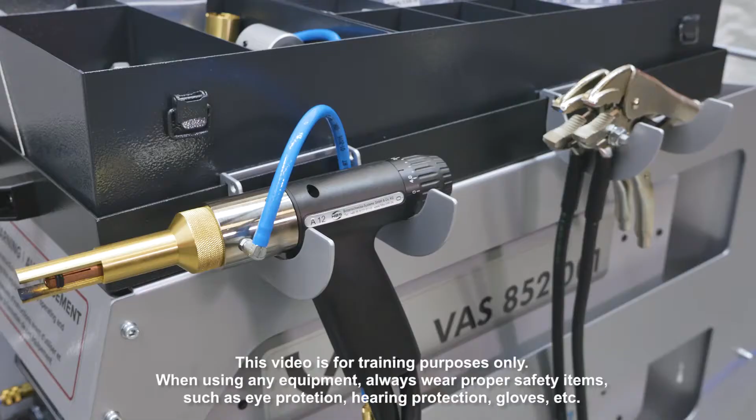Today we're going to be going over the carbon system. This system will do the structural aluminum studs welded onto the vehicle for ground studs. It'll do rivet removal. It'll also weld on the tabs for the dent removal system. On the carbon unit, we are going to start off with doing aluminum bits for doing dent pulling.

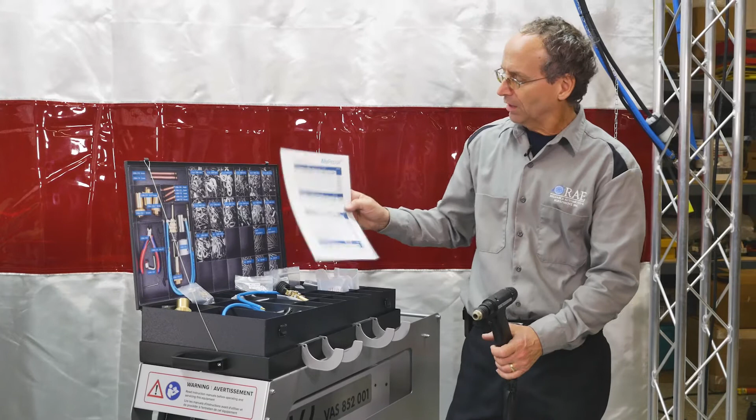So this is the gun unit that comes with it. A couple settings on here that we're going to go over. We have a little card here that will tell us everything that we need to know. So to get set up for the bits, this is the first piece that's going to go on. This will slide on. It's held in place with the little Allen screws.

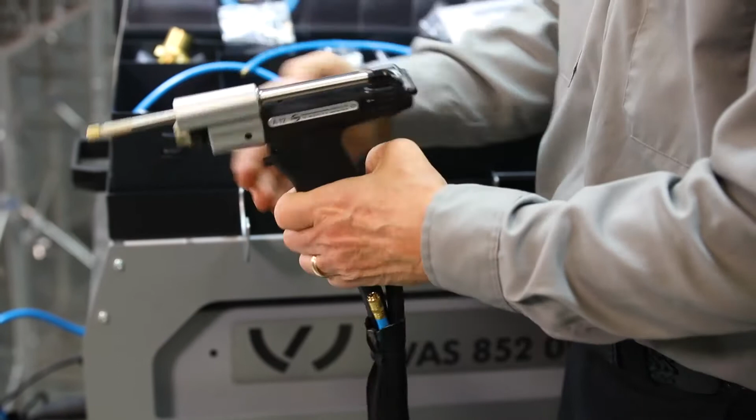This can rotate wherever you want, wherever it's comfortable for you to hold. Not a big deal on that. I'm just going to take the little Allen screws, snug these up. Don't over tighten them. It's just going into the plastic nose cone, just holds it in place. This is just a little spacer bar for setting up for the proper welding space of the bit itself. So we get that set.

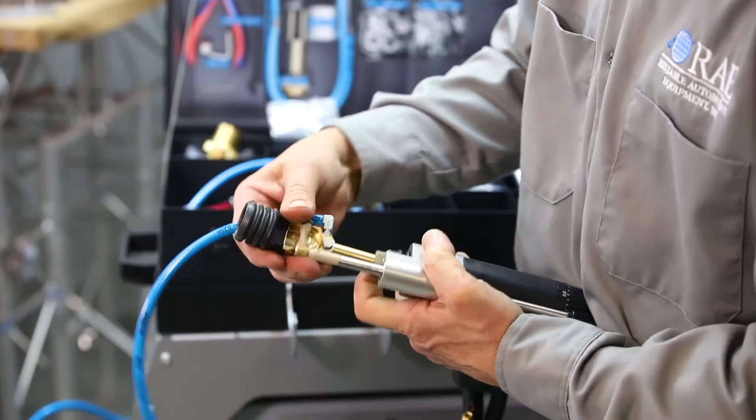This is going to be the piece that actually holds the aluminum bit, and that is just going to slide into the gun assembly here in the front. Just push that in, bottom it out. Just take the little nut there, snug it up. Take the wrench out, just a little, not real tight, just snug. We're going to take the blue hose, plug it into the blue hose. That's for the gas coming out.

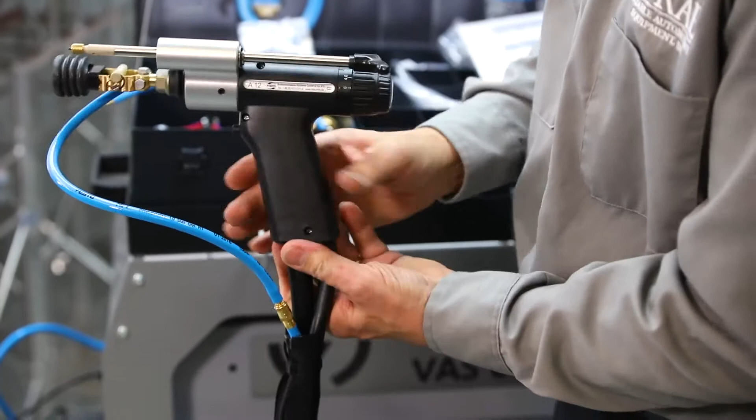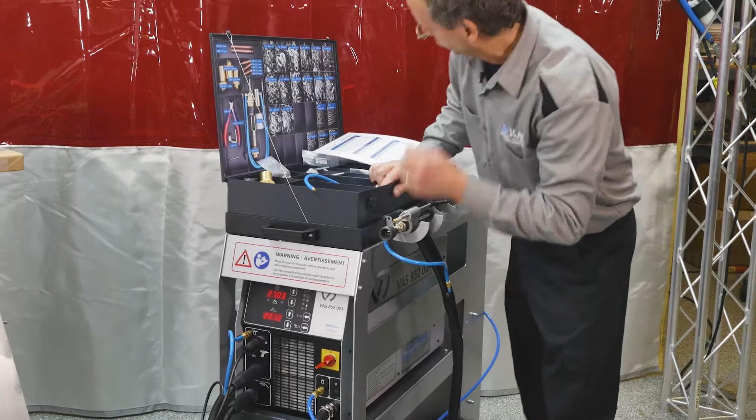So now we actually have this set up where the bit will set in here, and this will be our distance bar so that we have the correct distance on the panel. Before we go to set the bit in the gun, we're going to turn on the machine, main power switch here in the front. We'll turn the machine on. We're going to refer to our chart here because this is going to give us all our settings for doing the welding on the product that we're going to be doing.

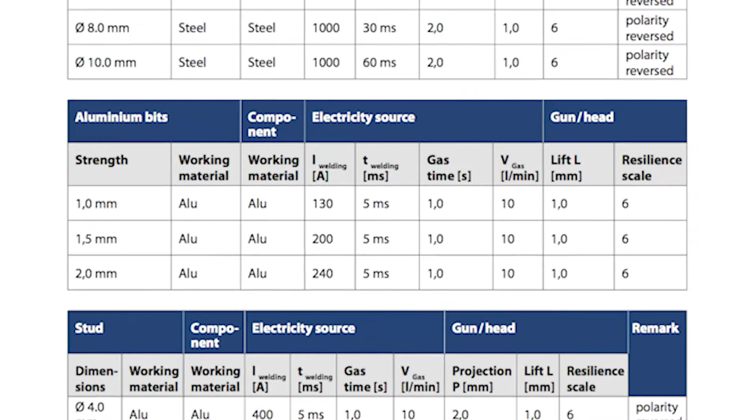We're going to be working with a 1mm bit today. Our working material is aluminum. Our component material is aluminum. On here, we're going to have an amperage setting. So this little A that's covered there would be 130 amps. Then we have a little timer that we set. So we'll have 5 milliseconds on the timer. The gas time is going to be set up for 1 second.

Right now we have straight argon on here for a shielding gas. They do recommend a trimix, which has nitrogen and helium in the mix also. It makes the aluminum burn a little bit hotter for a better weld. Then we're going to have the gas flow. They have it listed at 10 liters per minute.

10 liters per minute does convert out to cubic feet per hour at 21. We've gone through this in the industry for a while with liters per minute and cubic feet per hour. It's a very easy conversion rate to find on Google. We have a gauge that is listed in cubic feet per hour, so we're going to set that at 21. It will equal out to 10 liters per minute.

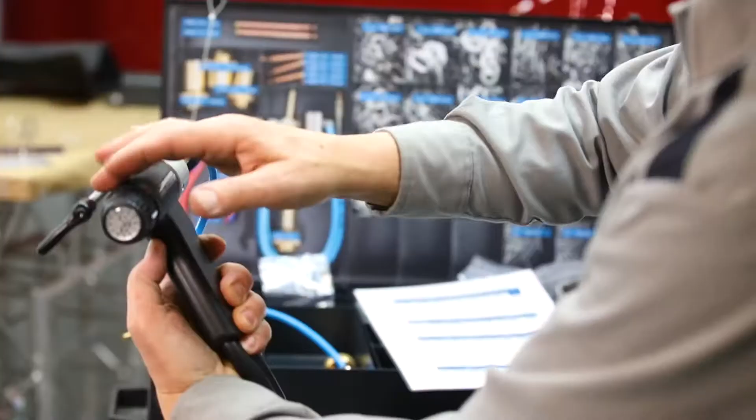Then these last two, this lift and this resilience scale, are going to be settings on the back of the gun. So this first one that says lift of 1.0, what we're going to do is take the back part of the gun here. We have a couple of knobs back here for setting the lift and the resilience. We have a little scale here. If you can see these little numbers, this scale just rotates around. There's no fixed point on this. To set this up properly, we're going to put the little 0 in line with the 0 on the label.

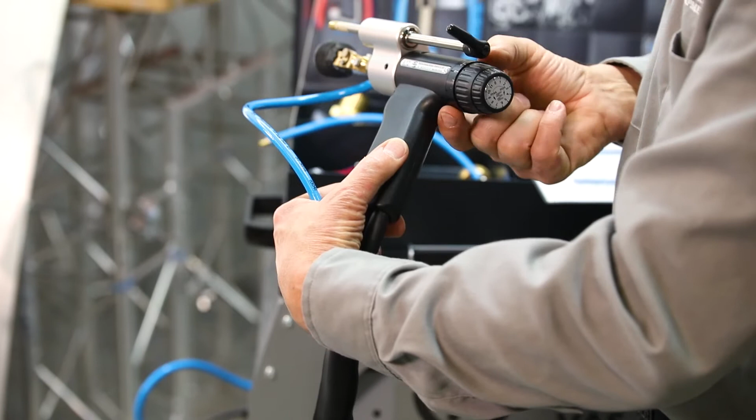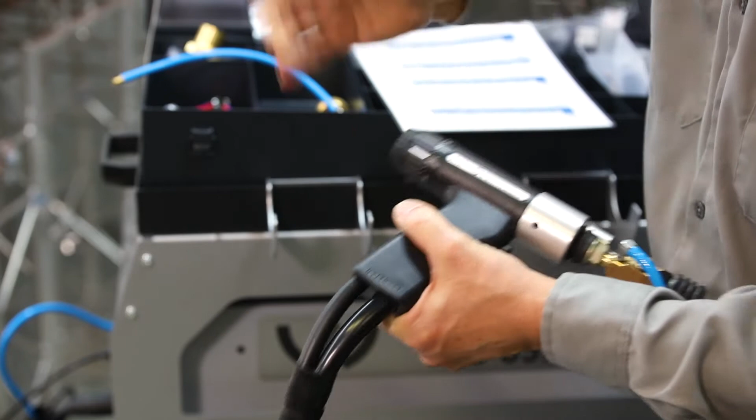So now that we've indexed that scale to the gun assembly correctly, there's a white line on this next scale, which if we pull this back, we can turn this, and now we can line it up to the 1.0 with this scale being indexed to the gun assembly. So I'm just going to take the white line, put it over 1.0 and lock it in. And then the next one on the scale is resilience scale of 6. And you have to do these in this order to get the proper reference point.

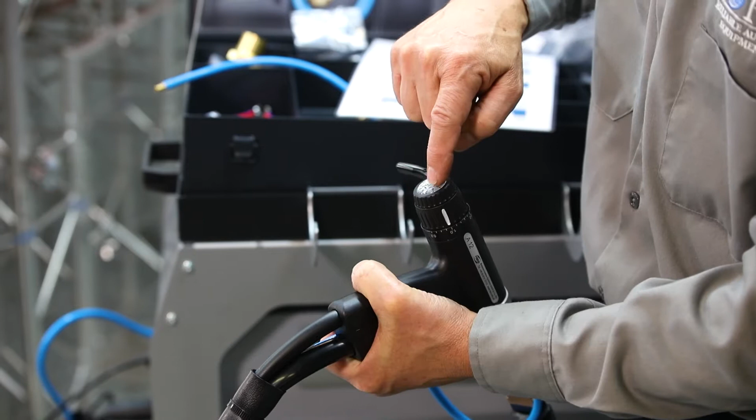So now that I have my white line, I'm going to take the very back part. This is the resilience scale. And I'm going to line up the number 6 right over the white line. So I'm just going to go ahead and take this, eyeball that down there. This here will just spin all the way around.

Number 6 over top of the white line is set on 1.0, and our scale is indexed out at 0 to 0. So we're good on our settings. So that is our very simple settings on here for setting the gun up. Now we're going to go to the front of the machine and set up our amperage and our time.

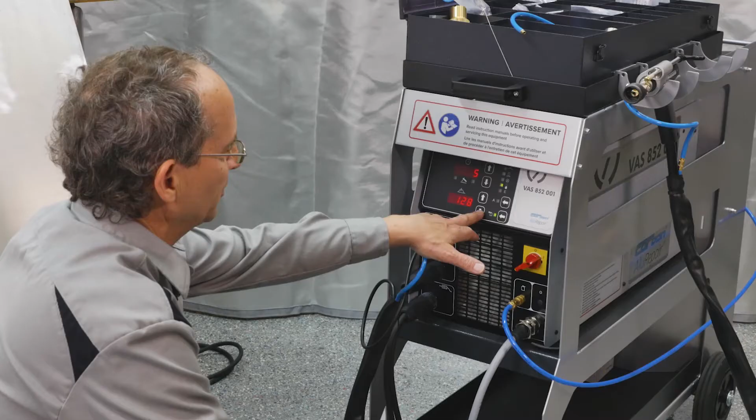So on the unit here, the first one on the bottom is the amperage. And we are reading 130 on the chart, and we are doing 130 here. And these you just use up and down arrows to change the numbers on that. The timer at 5 milliseconds is up here. The gas flow time, this is a dual system right here. So right now it'll always show the timer.

If I take the gas, turn it off, and then turn it back on, it'll flash. This will flash up 1,000 milliseconds, which equals 1 second. It will hold that for about 5 seconds and then go back to the timer time. So now I'm back on my setting of 5 that I can change anywhere that I want.

So that's our type of material, our amperage, our timer on it. The gas time is set at 1 second. The volume of the gas is set at 10 liters per minute or 21 cubic feet per hour. The lift is set and the resilience scale is set. Now what this does, this gets you set up to start welding your tabs on.

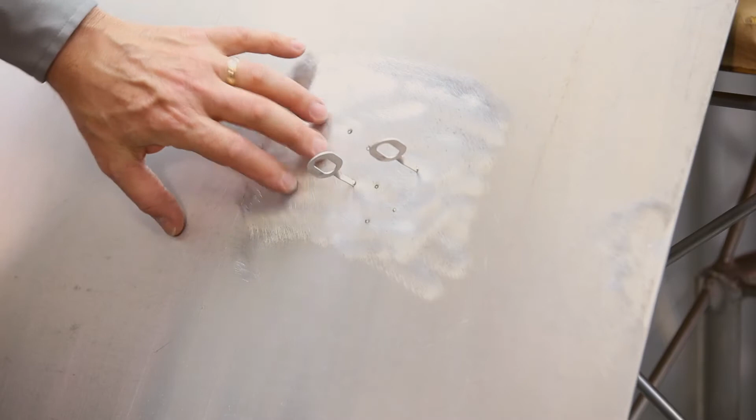So we're going to start welding at the suggested points of starting. When we weld one tab, we're going to see how it goes, and we might have to adjust it a little bit depending on the type of material. So we are going to grab a 1mm tab, and on all these tabs, there's a nice little index layout here for the different sizes.

We have tabs that will have a little half twist in them, and tabs that will have a straight piece coming down, so you can line up all your tabs depending how the crease is going, so you can get whatever rod or puller on it to have it come out properly. But these tabs are also marked. They're stamped in here, and it says 1/1.0. The 1.0 is the thickness of the tab.

The 1 actually stands for ALSI tab, or aluminum silicon. This is a 4000 series tab. If we take a number 2 series tab, that's going to be ALMG, aluminum magnesium, or a 5000 series. Then we have a number 3 tab, which is actually 99.5% pure aluminum. So you have different tabs depending on the type of material that you're going to be welding on.

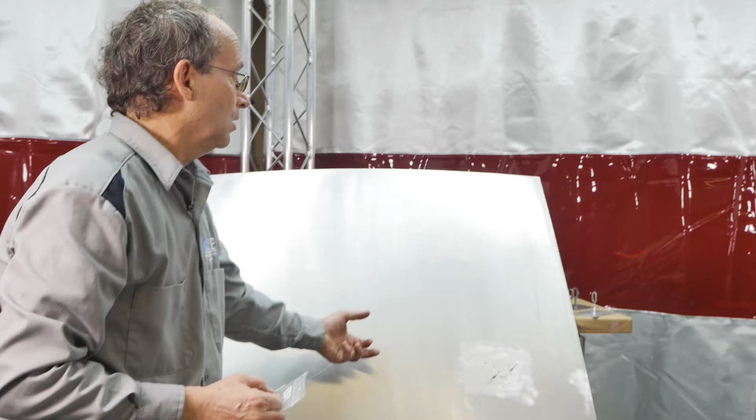The manufacturer does recommend trying the pure aluminum tab on your outer panels first. Through a little experimentation, on this panel here, which is actually a 4000 series roof panel, my ALSI tab actually welds on better. So I'm going to go ahead with this. We're going to start out at those settings and see how the pieces weld on. So the way that we set this up, gun assembly is all set.

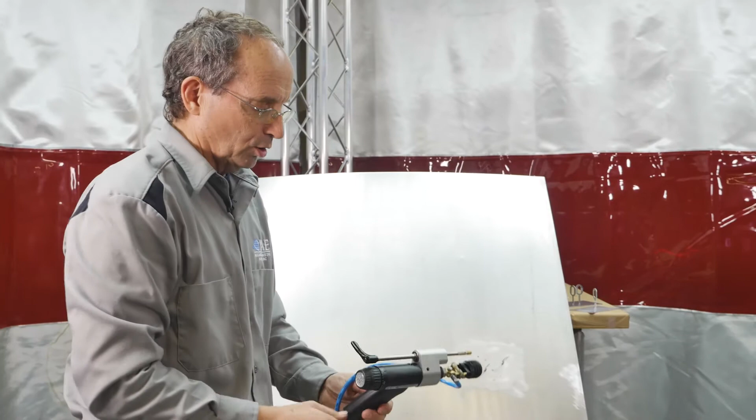So we take the tab, it's going to slide right into this area here. The side that is printed on should face up because it gives you better contact on the bottom for the gun assembly. So it just goes right inside of here, hits that little nylon roller, push it all the way in, and that's set to go. What this little lift bar here is going to do, if I turn it one way, it slides in and out. If I turn it the other way, it locks.

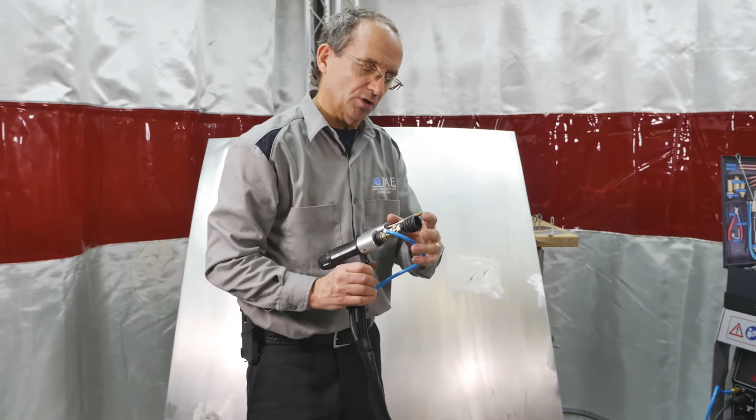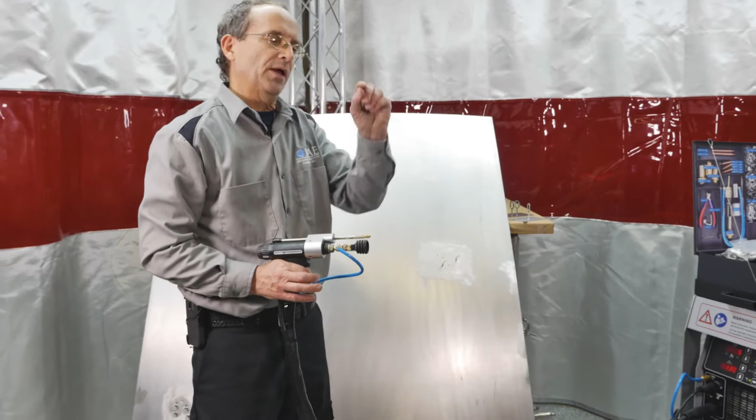Now what's going to happen in the welding process is that this tab is not going to weld into the panel. The problem with welding into the panel, if you pull the tab out, you have a chance of tearing out part of the panel. So what this is going to do is take this tab and pull it off the panel just a little bit. That's what that lift is for, about 1 millimeter.

The arc is going to happen, and it's going to melt the bottom of the tab and literally glue it right onto the top of the panel. So it's not being intrusive into the panel itself.

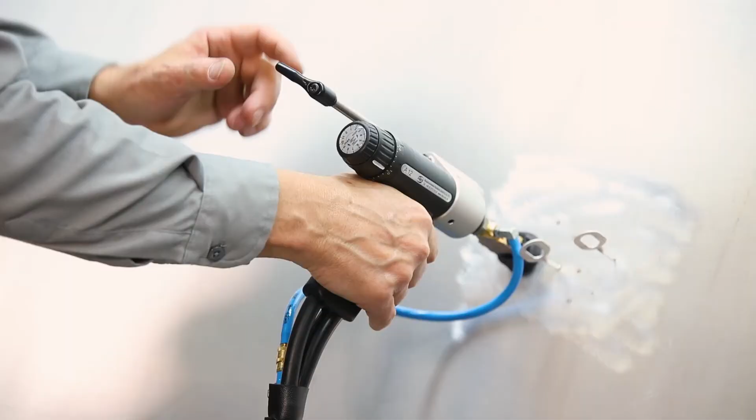So what this bar is going to set up: when I loosen this, if I hold my gun so that this tab is just touching the panel, not pushing on it, just touching, bring that in so that it touches, lock that in, and now when I pull the trigger, this will come back a little bit. This will keep the gun from going forward to make the weld.

We've got to hook up ground cables. It does come with 2. So on these, just going to clamp these on, nice clean area.

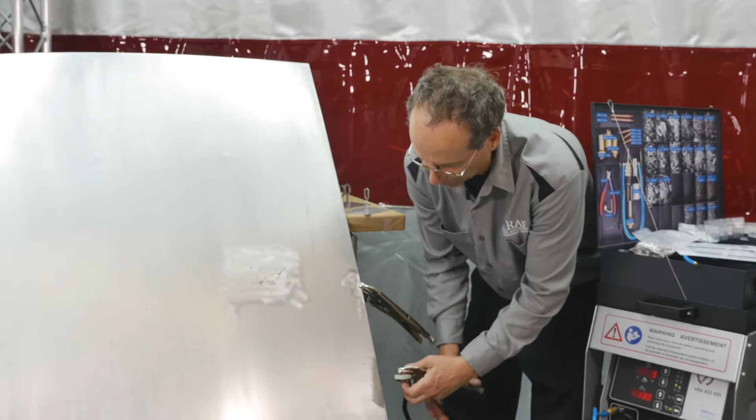The other thing that we do need to look at too is on the card, our aluminum bits are fine going across. On some of the other ones we're going to get into, there is an area where we do reverse polarity, so that you'll actually have the ground clamps taking the power coming in there, and then the gun itself would be grounded out.

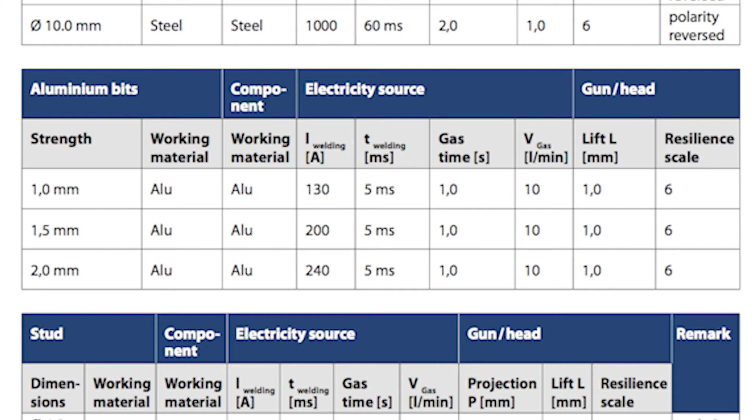So on the bits, we are going to do standard one, where the ground actually goes into the ground on the unit, and the gun assembly is supplying the power to it. When we go into the studs, we are going to be doing reverse polarity, and that does make a difference in how it does weld on the panel.

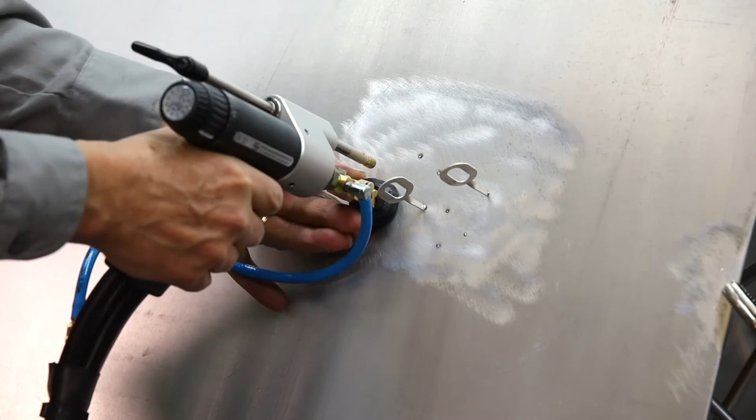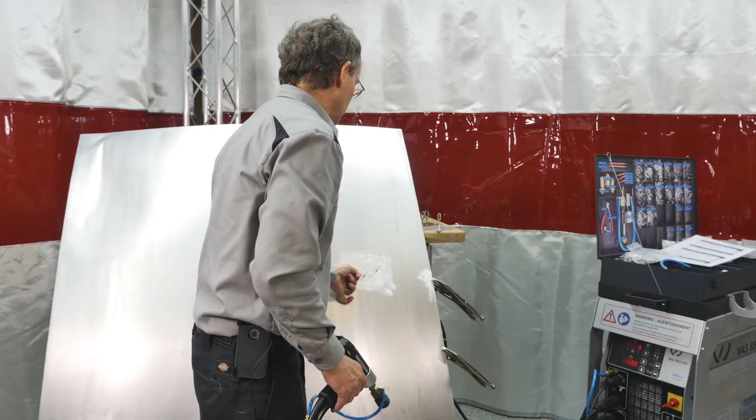So we have the gun set up, we have the ground clamps on, we set our gun up to the hood, we make sure that this panel, the lift device here, is adjusted correctly. So we can take the bit, do a little test on it, see how it welds on. Seems to be welding on pretty good. If it does pull off, instead of bumping up amperage first, just take your timer and add another 5 milliseconds to it. Give it a little bit more time to weld.

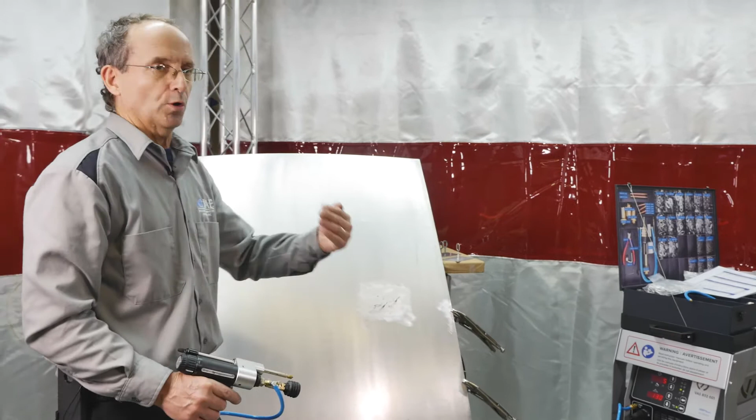So that's the little bit of a learning curve on this when you go to weld the bits on, what works and what does not work. When you look at the bit, it should look like a drop of melted aluminum on the end of the bit sitting right on top of the panel, which they are doing. So again, different thicknesses. You can increase amperage a little bit, but do up your timer a little bit first, and then you can increase amperage a little bit. That is welding the aluminum bits on.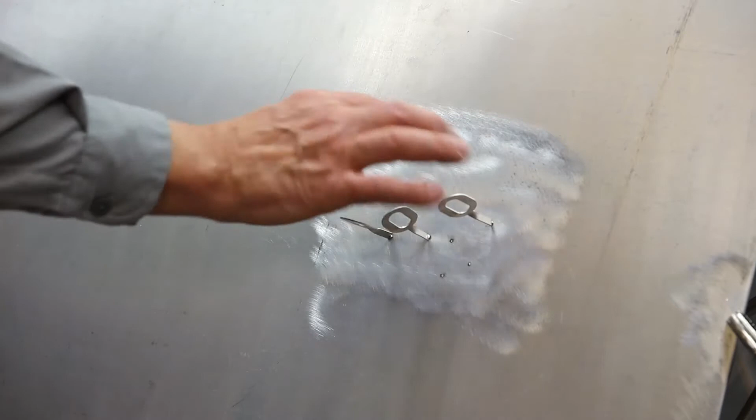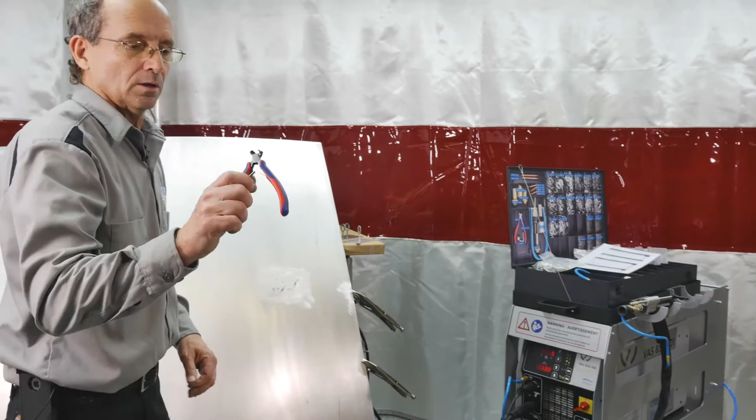Obviously, as you'd be welding them on, you would have them in a crease area where you would have them lined up, so you can turn the bits the way that you want to line it up to put the pin through for pulling the material out. The nice part about these is that when you go to take these off, don't twist them off. It comes with a little pair of pliers to get in there nice and tight. Clip the panel off and then take a body file and file down what you have sitting here.

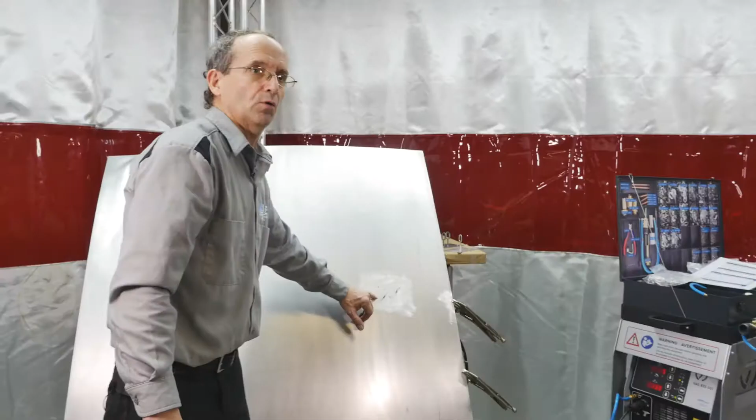Because if you go hit that with a little Roloc disc, what you're going to do is introduce a lot of heat into that little area, and it's either going to want to come out or suck back in a little bit. So once you have it back where you want it, finish off your material cold.

All right, we're going to do stud welding. And before I continue on with that, I do want to say that the instruction book that comes with this, the first part of the book is a very good history on aluminum and its source and some of the theories behind it. And then as you get into the other part of the book, it really has a lot of good information on setting up the unit, pictures of it, the different bits, the different studs, the different composition of the materials. There's a lot of good explanation in the book. This video is to help get you rolling on the system. This book will give you a lot more technical information to help you on completing the whole setup.

So when we go into the stud group, we do have one up here that is steel on steel. Today we are doing aluminum on aluminum. One of the first things we do notice as we go across, we are going to be doing reverse polarity on this setup for doing the stud welding. So instead of the power going from the gun to the ground, the power is literally going to come from the ground up to the stud, and that's what helps give it a great fusion into the material.

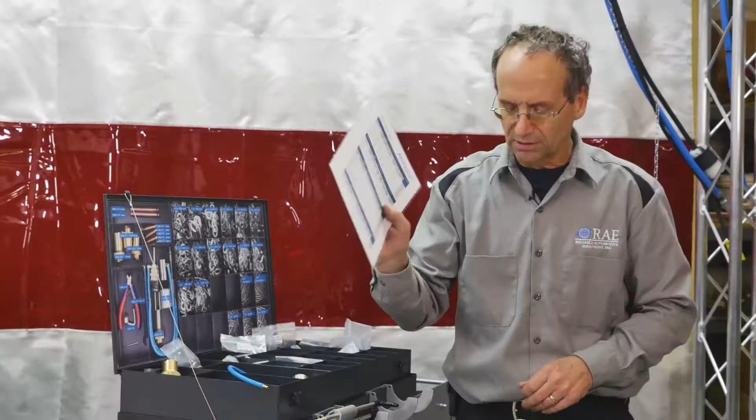So all we're going to do is take our main gun assembly, disconnect our ground wire, put the ground into the main gun, and then this one down into the ground, and that's it. Everything else stays the same. On setup on this, this is the little control plug for the gun assembly. This is for the gas. So when you plug in the gun assembly, plug in the little blue line. This only goes on one way. Turn it till it goes in position.

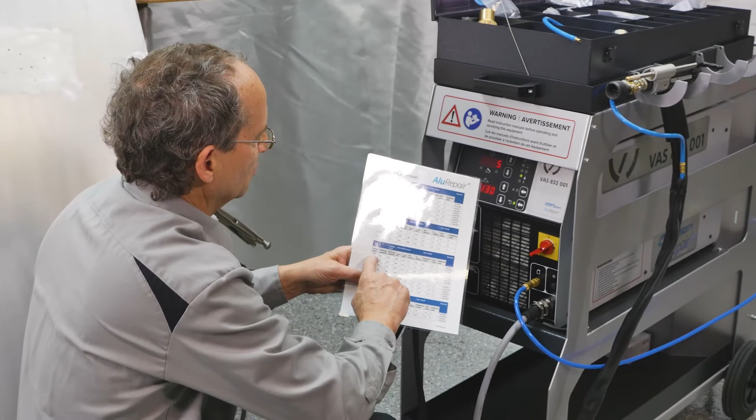Snug it up. That part is all set. So if we go into stud welding, we are going to be doing a 4mm stud, aluminum on aluminum. Our amperage is now going to ramp up to 400 amps. On the timer, we're going to be 5 milliseconds. Gas time pretty much stays the same. Gas time is going to be at 1 second. Gas flow again is going to be 10 liters per minute.

Now we're going to go into when we set the stud in there for the projection of the stud sticking in. We'll get into that in a second. The lift and the resilience is the same as what we did for the aluminum bits. That pretty much stays the same throughout all the operations. So the lift is set at 1.0. The resilience scale is set at 6.

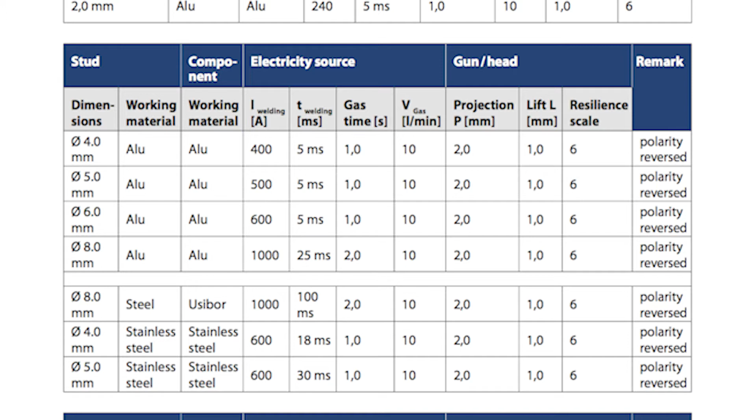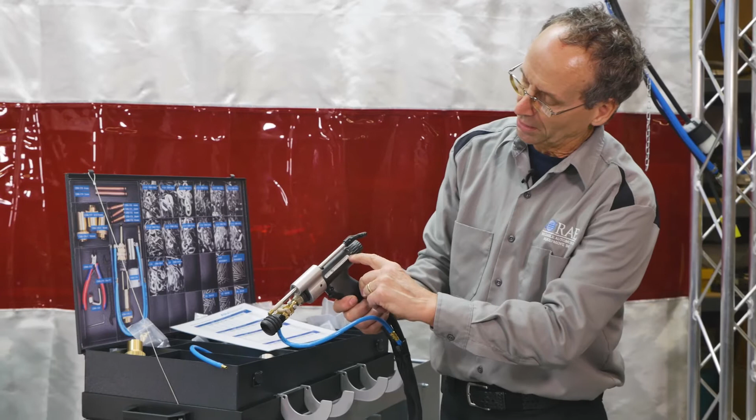What we're going to do is take a look at the gun, just verify that we didn't knock anything around on it. So again, we're going to make sure that the 0 on our scale is lined up with the 0 on the gun. Then we can check our little white mark is set up on 1.0. And then we can look at the resilience, and 6 is still over the white line. So we're good on our settings on that.

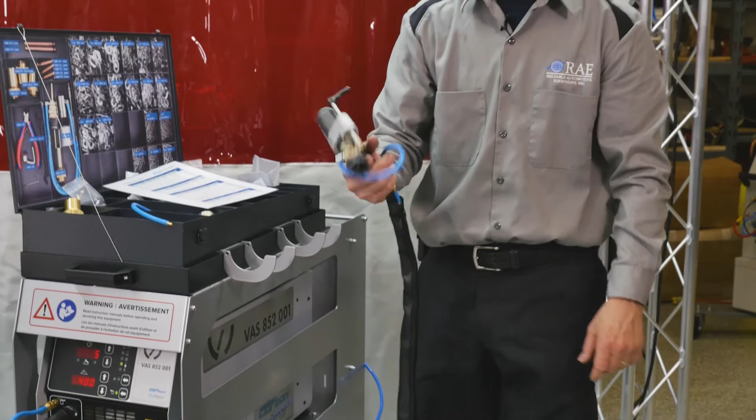But now we are going to change out this for doing the bits to what we need to do for doing the studs. So we disconnect the blue hose, reverse of what we've done, just loosen up this locking nut here. So this piece here slides out. We're going to loosen up the little Allen wrenches on this piece. So that piece there slides off.

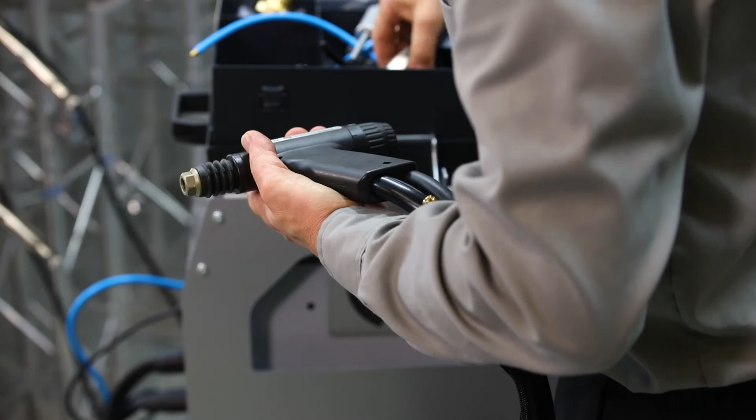So now we have the assembly that is going to hold for these studs. This piece here will go on just like the other one did. There's no particular location on this. We're just going to put this on, snug these up, and then we're just going to hook up the blue hose.

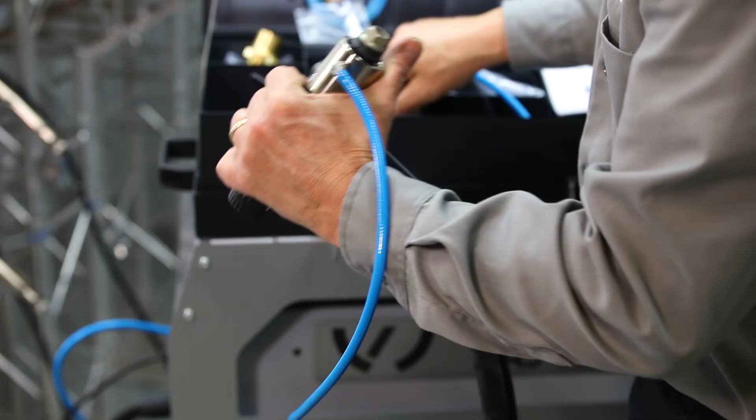So on our setup here, these are actually going to be studs welded onto the panel, not for the purpose of dent pulling, but for the actual use of having studs on a panel, such as a ground stud or a stud that's going to hold a piece of the wiring harness or a piece of equipment on the car. These come into great play when you're replacing a floor panel and it doesn't come with studs on it. Now, instead of having to cut the old ones off and trying to MIG them back on, you can just spot weld them back on with this system. That's one of the main purposes of this system.

So the different sizes that we can go on the studs is anywhere from 4 millimeter up to 10 millimeter. So that means the ground studs that are 10 millimeter, they'll weld on just fine. So we are going to be doing a 4 millimeter stud today. So in our packet selection, we have our different size studs. And these are all marked out with the numbers. I have this one out already. It's M4, so this is a 4 millimeter stud opening.

When we put this stud in here, I want to make sure that the stud itself is going to be approximately, not touching, but approximately about 1 to 1.5 millimeters above the top of the nose cone. Very important for that to happen, because the way that these studs work, and this little screw is an adjusting screw that will hold that, then I can lock up that little nut. So every time I put one of those studs in, it will maintain the same height.

So the importance of this is that all the power is designed to go through that little tip that's sticking in the center of the stud. If that tip is not there, this will not weld properly. If this gets turned at an angle and you catch it on the side, it will not weld properly. It's just a characteristic of the aluminum stud, the way that it welds on. If this stud is actually touching the nose piece itself, it will not weld properly. So that little bit of space right there is very critical for doing your setup.

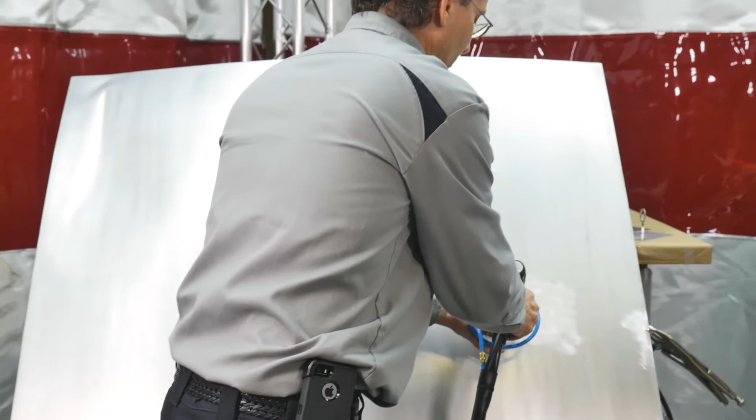The nose cone assembly is going to help you to keep everything nice and straight so that you're not putting this at an angle. With that sticking out, that will push back in as you push it onto the panel. So we just push in on the panel.

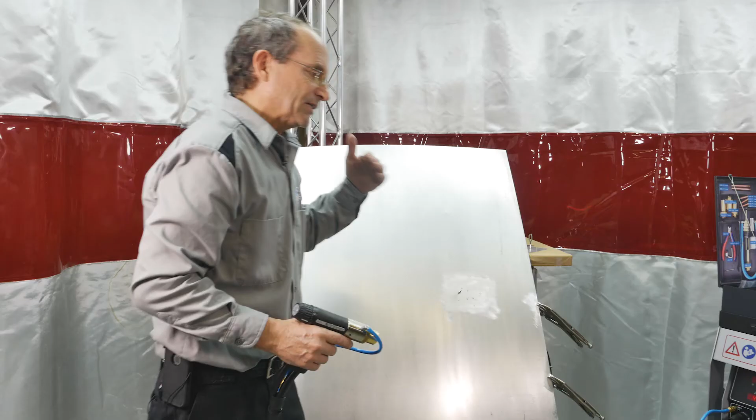And there's your stud welded on. Same thing now for your settings on the machine. Whatever type of stud you're welding on, if you can grab it and it falls right off, that means you just don't have enough power for that type of material that you're using. So we would do the same thing on that. Take our timer, bump the timer up a little bit more, up to 10 or 15 milliseconds, put another stud on there and make sure that you're getting good anchoring point to this.

And once again, this is not used to pull a dent out because this stud is now actually welded into the panel. And when you go to try and pull that stud out in doing dent repair, and the stud actually pulls out of the panel, you usually take a chunk of aluminum out with it. So this is basically for a stud replacement on the car itself.

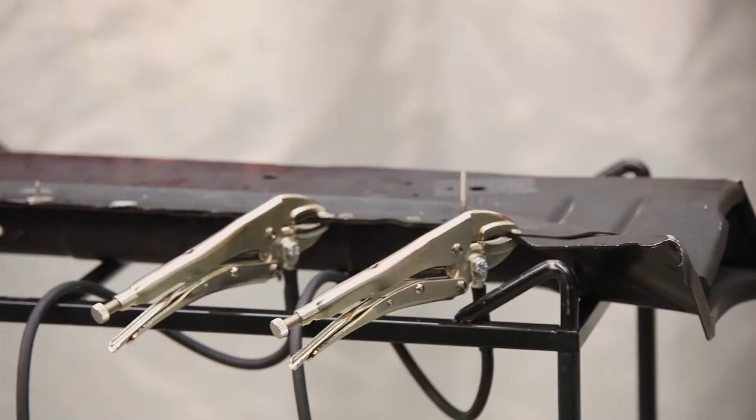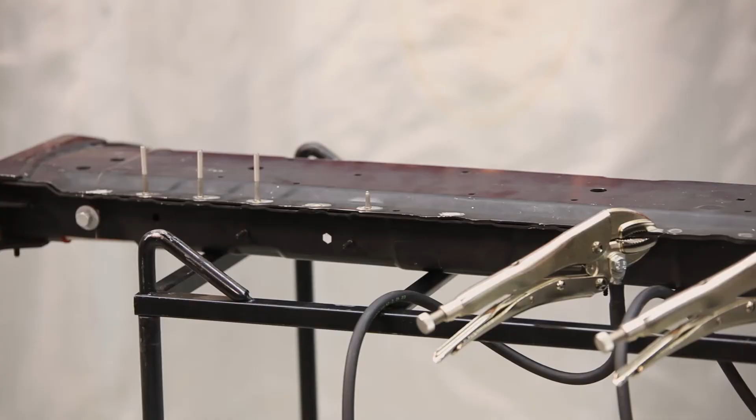So now we're going to go into stud welding for rivet extraction. So on certain OEs, you're going to run into a problem on trying to push rivets out of not having accessibility to it. Some of the newer rivets are being made out of such an ultra high strength steel. They don't want you drilling them out because they're so hard to drill, and the drill bit will create an oblong opening in there. So on the manufacturers that recommend the welding, we're going to set this up for doing a stainless steel piece on the rivet head itself.

You can already see one on here. And we're going to set up the gun now for that assembly on there. That is still going to be underneath these studs in the sheet, where we're going to be doing a 5 millimeter stainless steel stud onto the stainless steel rivet head. So our setting is going to be 600 amps, 30 milliseconds on time. Gas time is going to stay the same at 1 second.

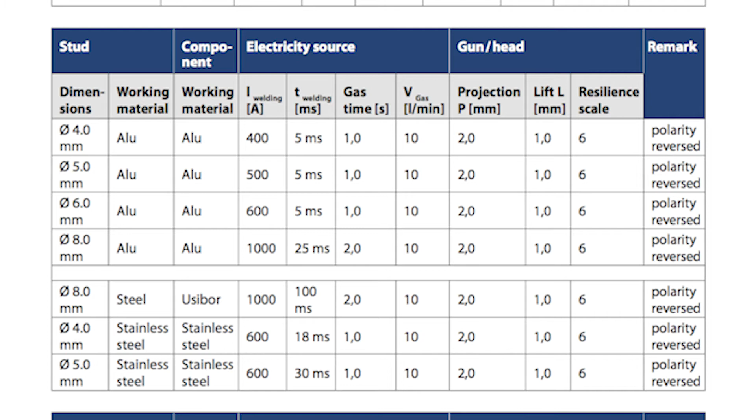The volume of liters per minute is going to stay the same. The projection will be the same as when we did the other studs, a 2 millimeter projection. The lift and the resilience scale set on the back part of the gun are going to remain the same. So again, on the gun, we're just going to verify on the back. Our 0 lines up with the 0. Our little white mark lines up on 1.0, and the back part of the scale 6 is still over the white mark on it. So we're verifying that we're good on that.

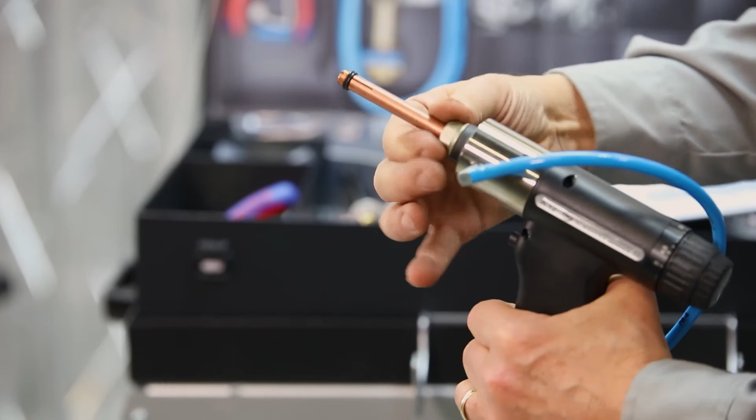We still have the same front on here that we did with the studs. I just took off the short little nozzle, and now we are going to put in this special pin for the 5mm stud, which is going to set into here like the other one. Just snug that up. Snug that up, and then this has a little bit longer nose piece going on compared to the other one. So we're going to grab a 5mm stud.

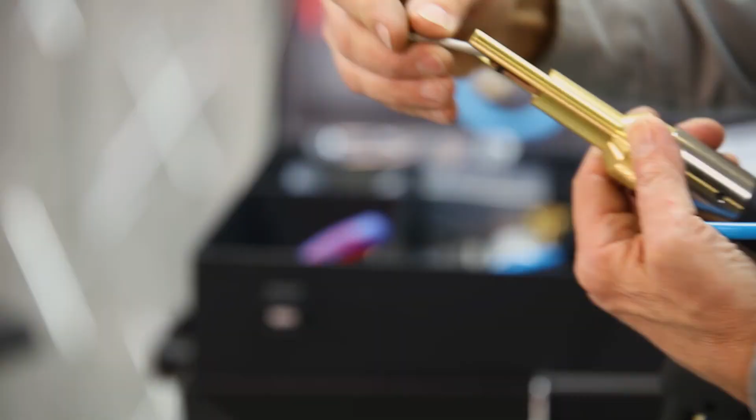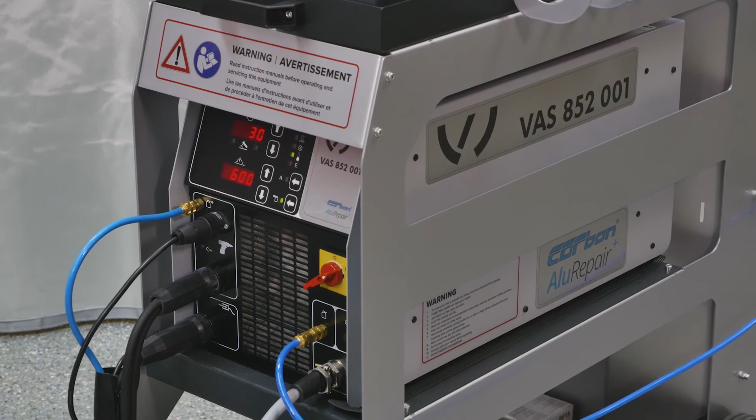So when we put the stud in this, there was no screw adjustment on the back side of this stud holder. This is designed to go in exactly the way that it is, and that will give us the 2mm standout projection. That's already pre-engineered in the stud and the stud holder itself. Our setting on there, I've set it up to 600 on the amperage, 30 milliseconds on the time. And what we're going to do on this now is we've cleaned off the head of the rivet that's on here. Our 2 ground clamps are in place.

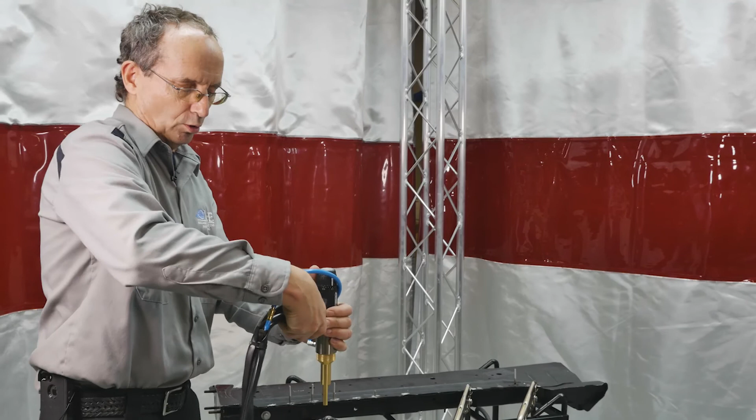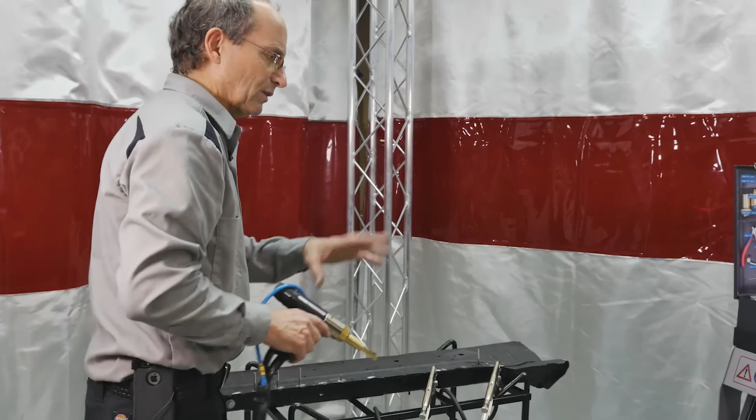I want to make sure that my stud assembly is going to be straight over top of the rivet. You take your time on putting it on. Make sure that you hold the gun straight in all directions. We don't have that round cone like we did before, so it's just 2 little legs sticking out to get into a tight area. And we want to make sure that we're nice and straight on it. This is going to throw a couple little sparks on it. There is a little bit more power going through this. So I'm eyeballing the center of my stud, pushing down on it till my little pieces get there. Pull straight up, your stud's in place.

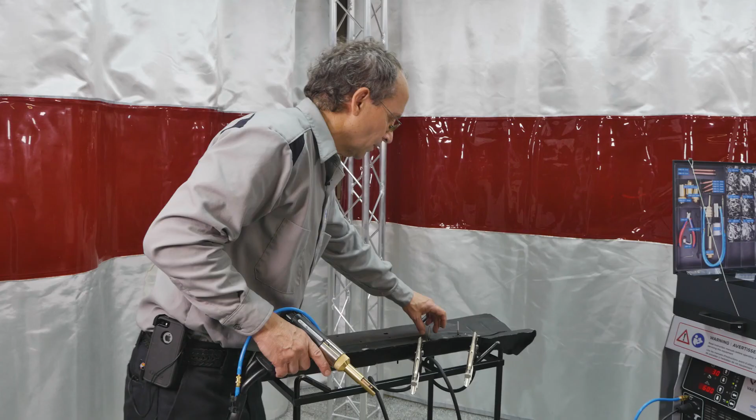At this point now, you would take the extraction tool that would go over the top of this, and then that would end up pulling the stud out. And the extraction tool is part of the rivet gun assembly on the Express 800. Looks similar to the blind rivet tool with the long nose on it. Would go over right on the top. It would base out right here, and then it would just pull the stud right out and retrieve it.

Okay, guys, that wraps up the carbon unit for today.